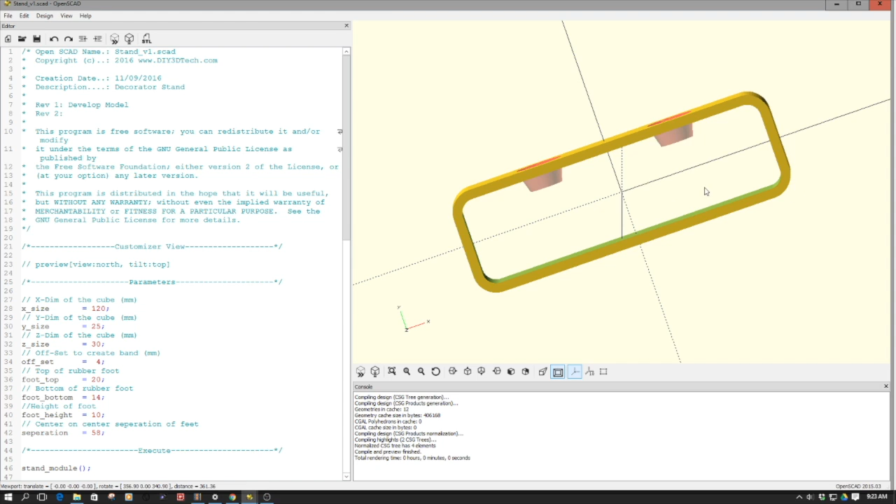In this episode, we're going to take a look at building a component stand. Actually, I'm building this for a tube buffer on my hi-fi system. However, there are two major things with this build that I want to share that I've done, which you guys might find interesting.

And the first is I wanted to match the chamfer of the inside curve with the outside curve, because if you do this in something like Tinkercad or Fusion 360, with blocks and combining primitives of say a rectangle and circles, you won't be able to match this offset, and this is part of the key.

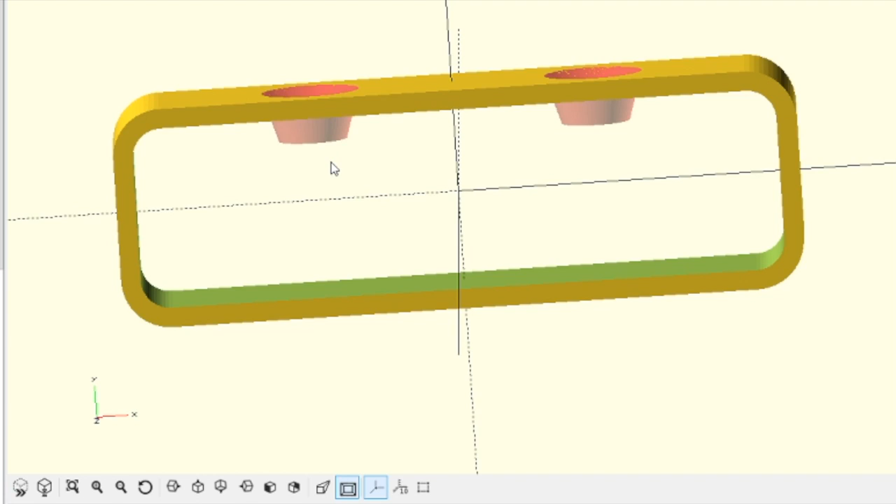The other piece is these openings that actually mount the feet. So one of the things I've done, as you can see here, is I've modeled the actual feet, and they taper. So the foot presses in here and becomes a press fit into this whole bracket, and this is what really holds everything in place. So I thought this was kind of a neat concept.

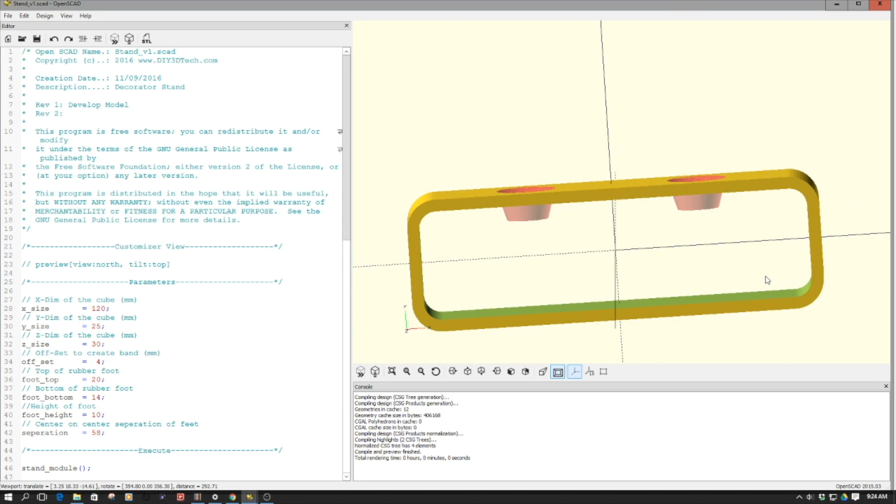Now I've made it semi-parametric over here where you can set the different settings, and the code will be out on the website with the link below. So if you want to pick it up and design your own feet for your own stereo equipment or any type of electronic or home entertainment system, you're welcome to grab it.

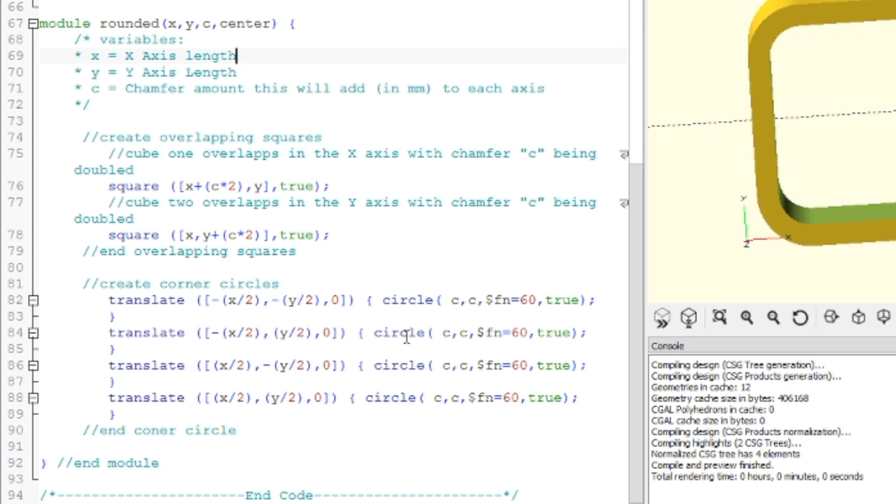However, I want to jump down in here to how I did this. First off, I started out making this a 2D object. I had taken this code off the internet, and it was originally meant to create a rounded cube. However, I replaced the cylinder function with a circle and the cube with a square to create a 2D object, and then I dropped the z-axis up here.

Now, why is this important? Well, when I call it up here, I obviously linear extrude the object, but I also create an offset for this. So my difference from the inside is going to be the offset. So here I linear extrude what starts out to be a flat object, from rounded. The original is created up here, and then I subtract the difference with this, using the offset command right here.

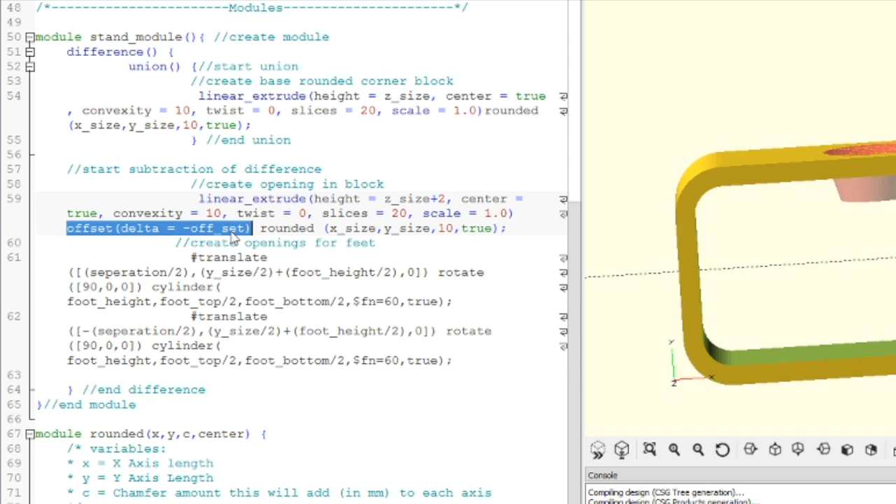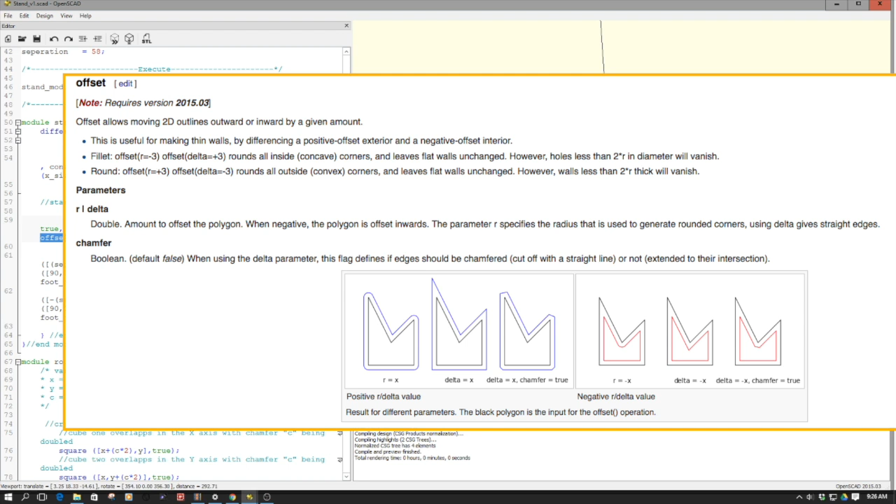So I use offset delta equals offset. My variable is offset, so I can set how much smaller I want this to be on the inside. Now when I call delta, it means I want it to match the exact curve of the outside. So let's go ahead and pop this in and take a look. You can see the square now over here, and how it matches this. This is achieved by utilizing the delta.

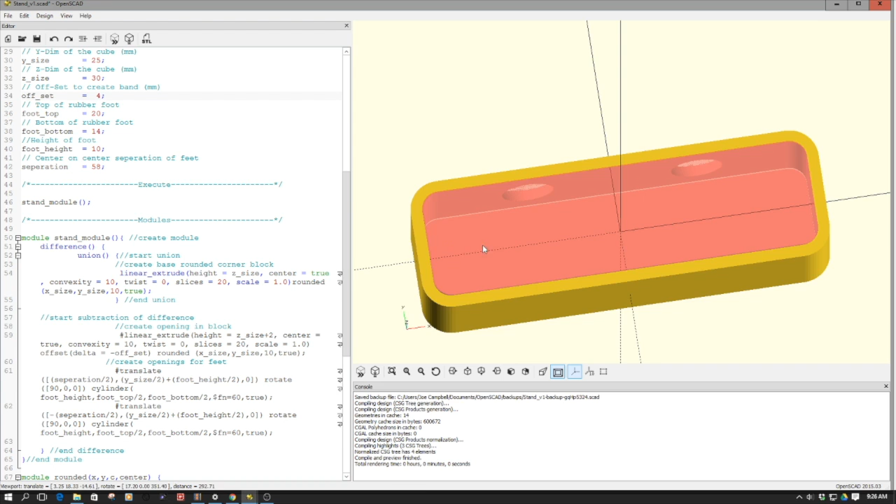And then up here I call offset by 4 millimeters. So my thickness here will be 4 millimeters. If I want to make it 6 millimeters, I can change that, and you can see it thickens it up a bit. I'm going to go back to 4, and so that's a pretty neat function. And again, you can only call this with a 2D object that you've extruded. So this makes it really nice if you want to match the curves, and it makes for an elegant looking stand, at least in my opinion.

So I want to remove this and go back and talk about these. Down here in these two pieces is where I translate. I simply use a cylinder command here and here to create the two cylinders. I utilize an offset of the distance, splitting the distance in half between here and here for my origin. And then I take the measurements from the device, and since this is tapered, the feet fit inside the taper.

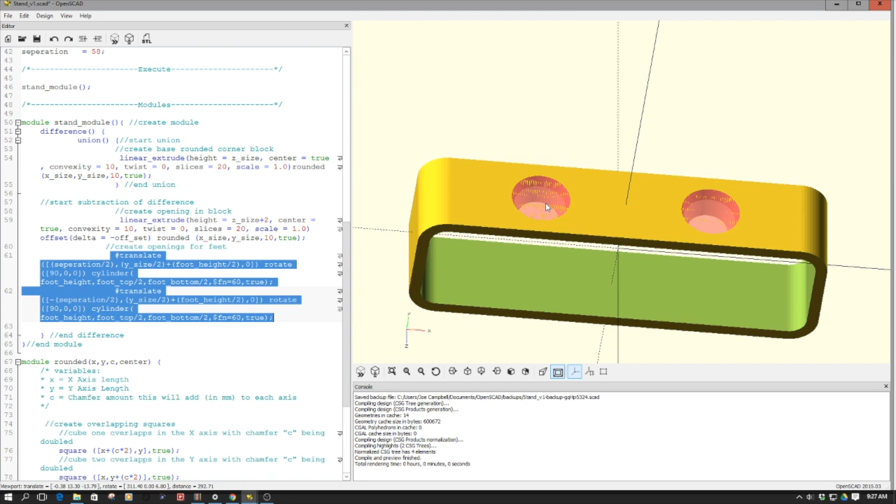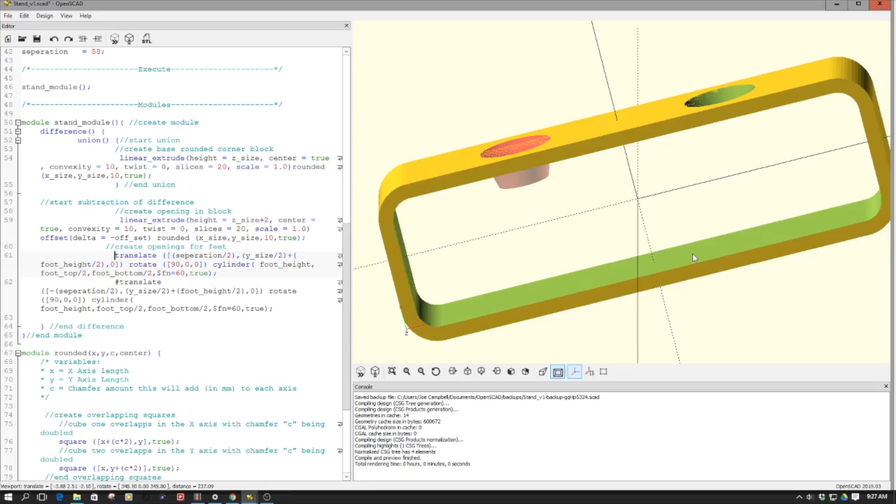So let's see this. I'm going to remove one of these and take a look. You can see a little bit of the taper here. It's bigger at the top, gets smaller at the bottom, and as we'll see, the foot locks into it. So let's jump into a time lapse of one of these being printed, and then go over to the bench and look at it all installed. We'll catch you over at the bench.

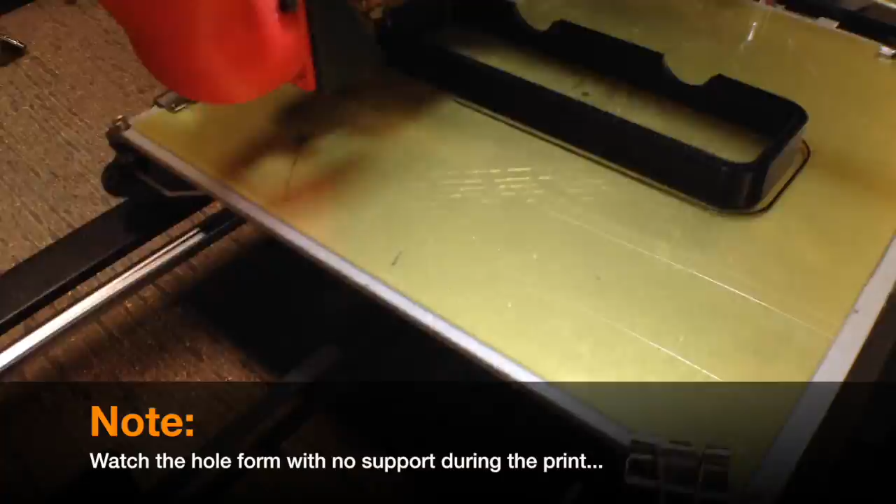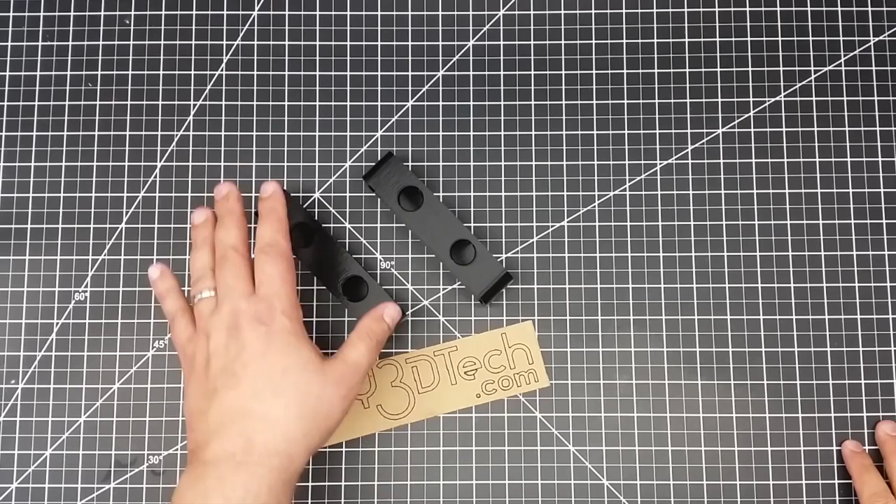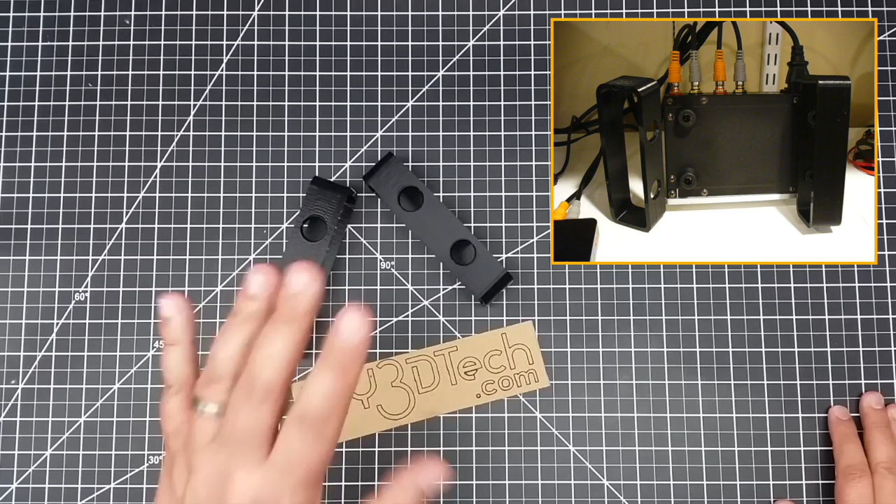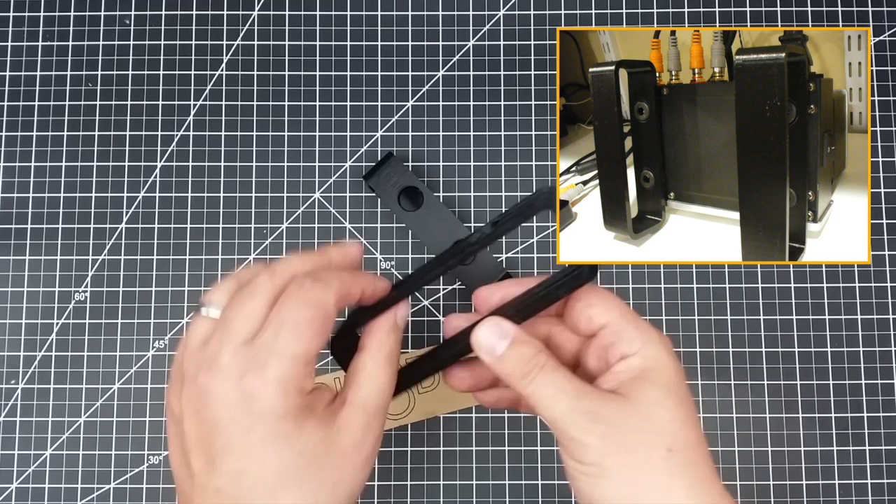Okay, welcome back. So we took a look at these in OpenSCAD and saw one being printed out in time-lapse. It's very cool how it prints these voids with no support. Also, up in the corner, probably as an overlay, I'll show them actually installed. They're a nice tight fit onto the feet because we angled this to match the foot, so the foot actually slides in there and sticks. So these are elevated.

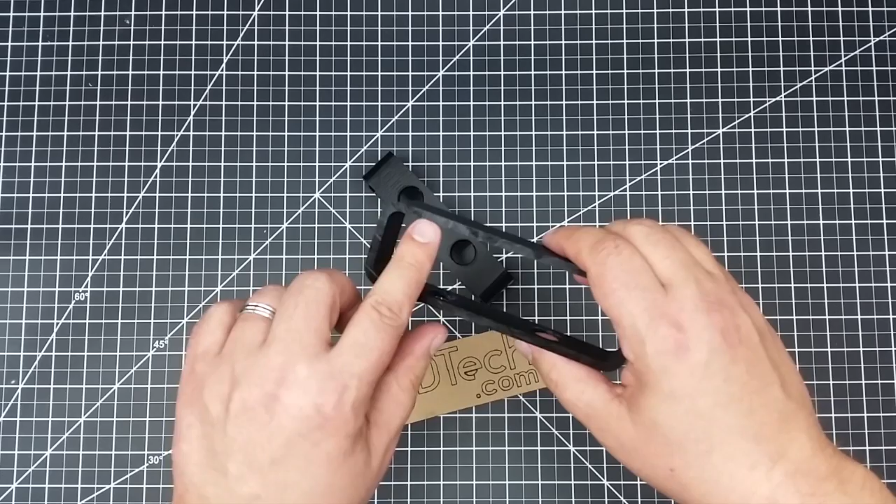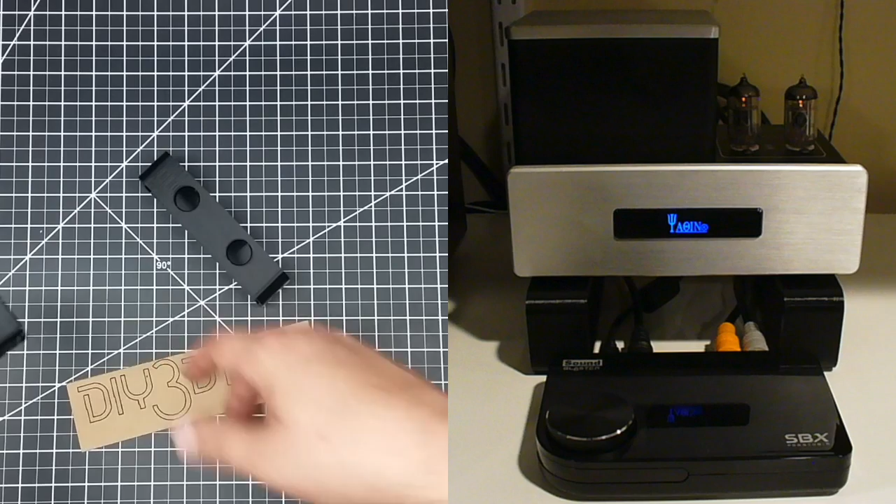Also, this is pretty strong, which is really impressive. And we have a nice bend in here that matches the outer bend. So aesthetically, they're very attractive. The prints came out very nice. And as you can see, as I swipe over, how they look installed on the buffer. So anyways, hopefully you found this build interesting.